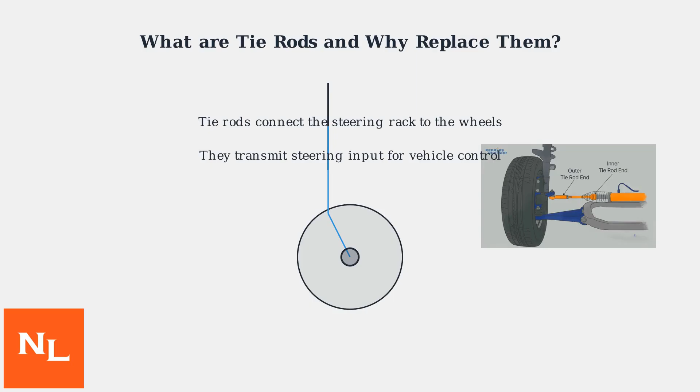Tie rods are crucial steering components that connect the steering rack to the wheels, transmitting steering input to control the vehicle. Replace tie rods when you experience play in the steering wheel, uneven tire wear, vibrations, or the vehicle pulling to one side. This wear is often caused by road hazards, corrosion, or age, typically after 50,000 to 100,000 miles.

Begin by parking your vehicle on a completely level surface to ensure stability. Engage the parking brake firmly to prevent any movement during the repair process. Next, use a lug wrench to loosen the lug nuts on the front wheels you'll be servicing, turning them counterclockwise about a quarter turn, but leave them on the studs to keep the wheels secure for now.

Now, locate the designated jacking points under the vehicle frame. Use a floor jack to slowly raise the front end, then immediately place jack stands under these points for support. Never work under a vehicle supported only by a jack.

With the vehicle securely supported, fully remove the lug nuts and take off the front wheels. This exposes the tie rods and other steering components for inspection and replacement.

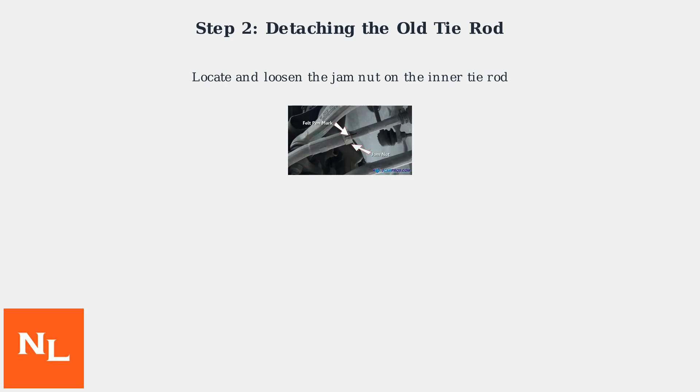First, locate and loosen the jam nut on the inner tie rod. This allows adjustment of the tie rod length. Next, use the tie rod separator tool to detach the outer tie rod end from the steering knuckle. This breaks the connection safely without damage.

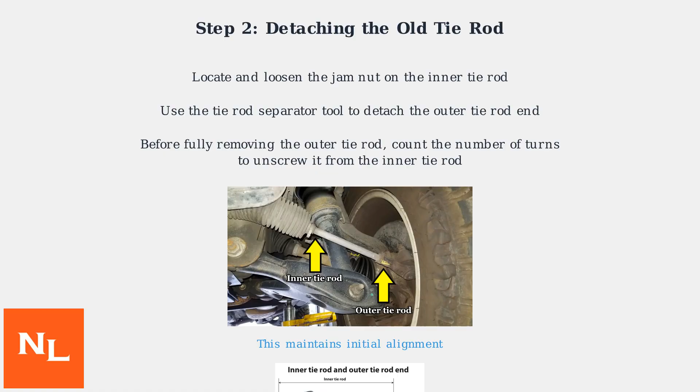Before fully removing the outer tie rod, carefully count the number of turns it takes to unscrew it from the inner tie rod. This counting helps maintain the initial alignment of the steering system. Screw the new outer tie rod onto the inner tie rod, using the same number of turns you counted during removal. This will get you close to the original alignment.

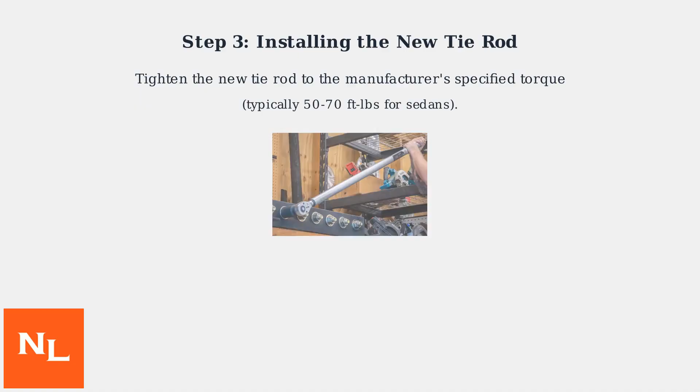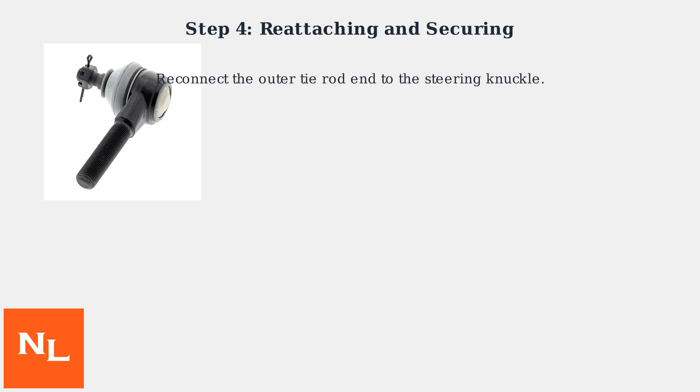Tighten the new tie rod to the manufacturer's specified torque, typically 50 to 70 foot-pounds for sedans. Apply grease to the tie rod joint. Now, reconnect the outer tie rod end to the steering knuckle. Tighten the castle nut to the specified torque. Install a new cotter pin. Secure the jam nut against the outer tie rod, ensuring it's tight to prevent loosening.

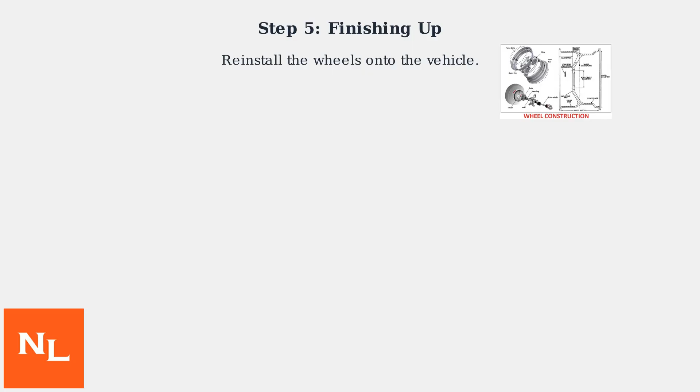Now for the final steps to complete the tie rod replacement. First, reinstall the wheels onto the vehicle, ensuring they seat properly on the hubs. Carefully lower the vehicle back to the ground using the jack, then remove the jack stands.

Using a torque wrench, tighten the lug nuts to the manufacturer's specification, typically between 80 and 100 foot-pounds, following a star pattern to ensure even tightening. Finally, double-check all nuts and bolts you worked on during the replacement to ensure everything is secure and properly tightened.

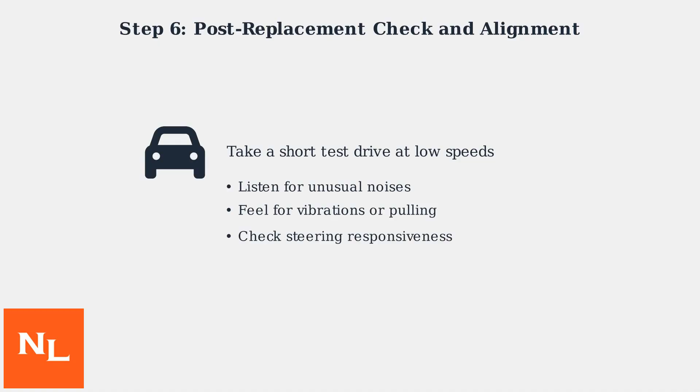After reinstalling the wheels, take the vehicle for a short test drive at low speeds. Pay close attention to any unusual noises, vibrations, or handling issues like pulling to one side or loose steering feel.

Most importantly, get a professional wheel alignment performed immediately after replacing tie rods. This critical step ensures your vehicle's steering geometry is correct. Proper alignment provides safe handling, prevents uneven tire wear that could cost hundreds in premature replacements, and extends the life of steering components. Neglecting alignment after tie rod replacement can lead to dangerous handling problems and accidents. Schedule this service within 24 hours to maintain safety and save money.